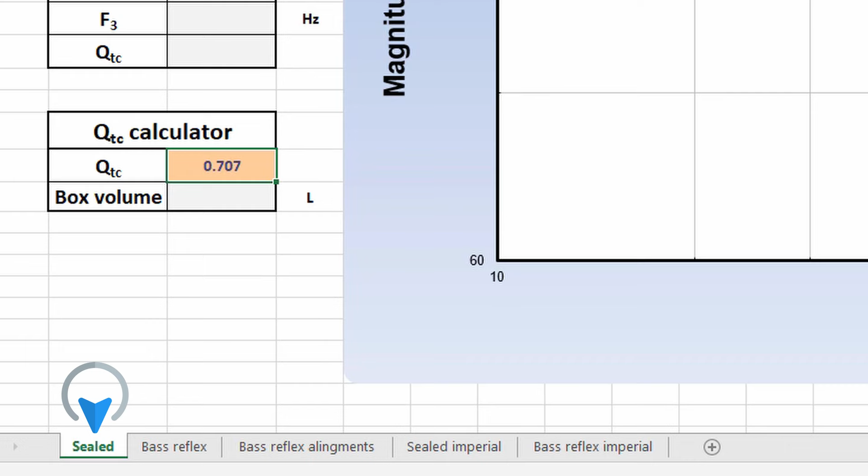So let's open up the spreadsheet and I'll explain things as we move along. First observation: the spreadsheet has multiple worksheets. You can see here sealed, which I covered in a previous video. If you want to design a sealed box, you can check out that video.

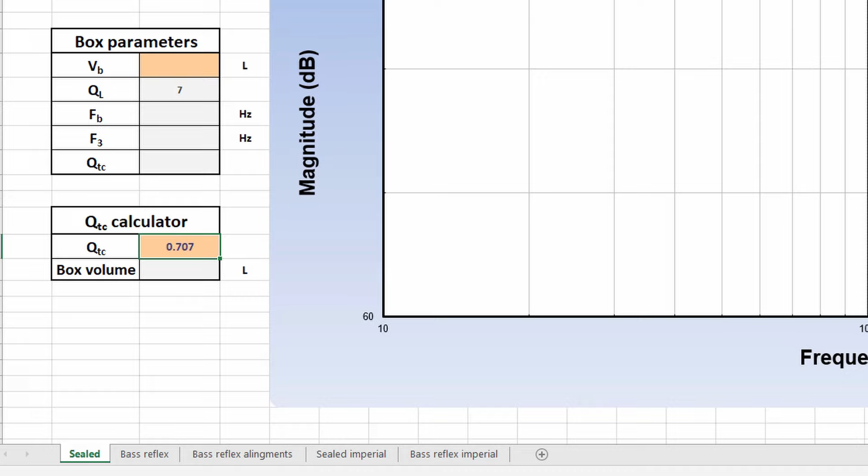Depending on which units of measurement you prefer, you are going to click the appropriate tab. This one is for liters and millimeters, and this one is for cubic feet and inches. The same thing goes for bass reflex boxes. What concerns this video, I'm going to use the metric system, so liters and millimeters.

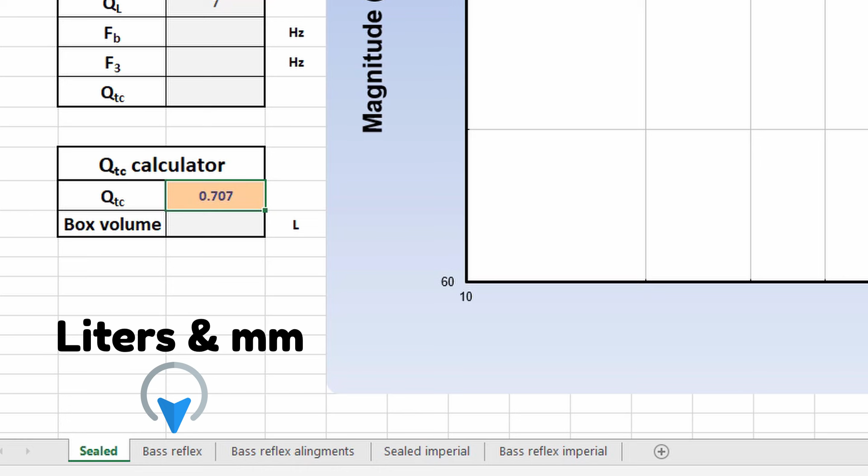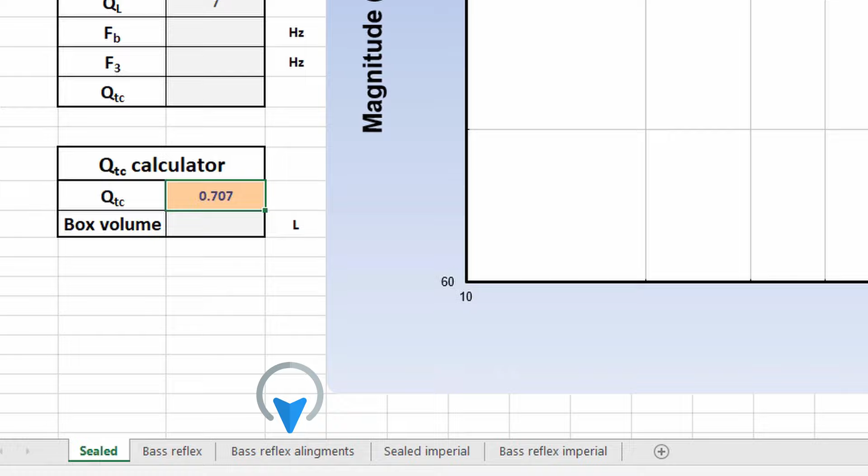Before I click the bass reflex tab, there is another tab which pretty much serves no obvious purpose: the bass reflex alignments tab. If you click it, you will see this table full of numbers. These are copied from the Loudspeaker Design Cookbook and are simply here to be used when calculating the appropriate volumes and tuning frequencies. Now don't get stressed out, I know you got intimidated by this wall of numbers.

But I'm going to say a few words about the alignments because they are not that difficult to comprehend. So here's an explanation. Basically, a speaker has a lot of parameters, one of which is QTS. If QTS is between certain values, then that speaker is eligible for particular alignments. You can think of alignments like presets that will give certain sound signatures which are desirable.

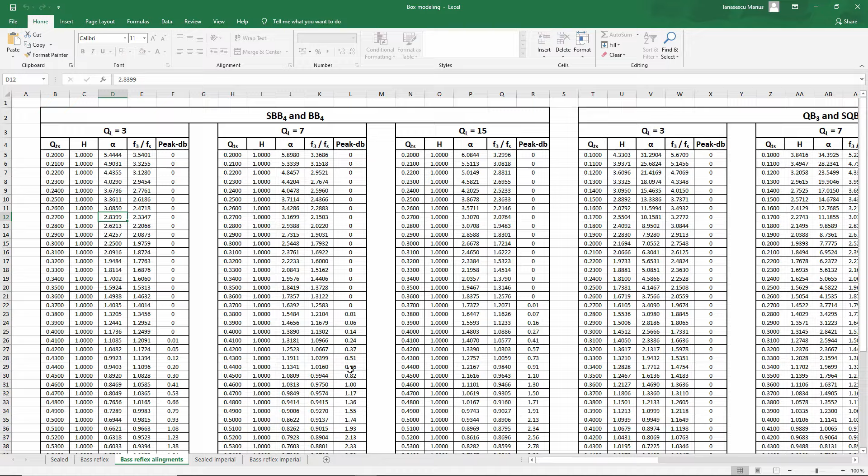Now, if you read the Loudspeaker Design Cookbook and got to this section, you probably got frustrated. No one likes to see a wall of numbers, and also check out the names of these alignments. This is SBB4, or 4th order boombox. This one over here is QB3, or 3rd order quasi Butterworth, and this one is SC4, or 4th order sub Chebyshev.

But don't worry, you don't have to remember anything, you just have to know what response they achieve, and if you are after that response, you can pick that particular alignment. So for example, SBB4 is an alignment which will result in a response very similar to a sealed box. It has a very smooth roll-off and very good transient response.

QB3 is the maximally flat response, usually called Butterworth response, and for all intents and purposes, this alignment is the one which people will aim for. If your particular driver has a high QTS, you might consider the SC4 alignment over the QB3.

Now that we finished talking about the alignments, let's start designing a bass reflex box. So let's click the bass reflex tab. If you are not familiar with my spreadsheets, what you need to know is that in the orange cells, you will input data. If it's not orange, you leave that cell alone as it might calculate something and you can mess up the formula.

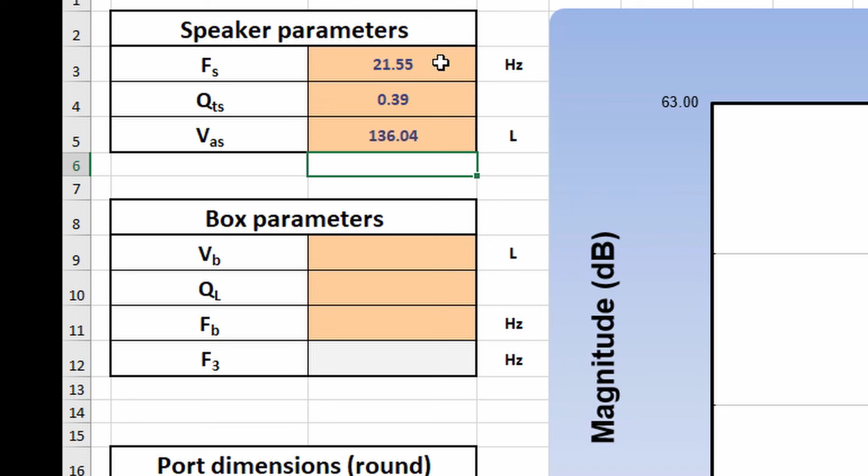What concerns the parameter in the middle, QL, refers to box losses. This is an optional parameter, and some modeling apps don't even mention it. It indicates the leakage of your box. If you have a leaky box, QL is low, like 3. Normal losses, QL is around 7. Low losses, QL is about 15.

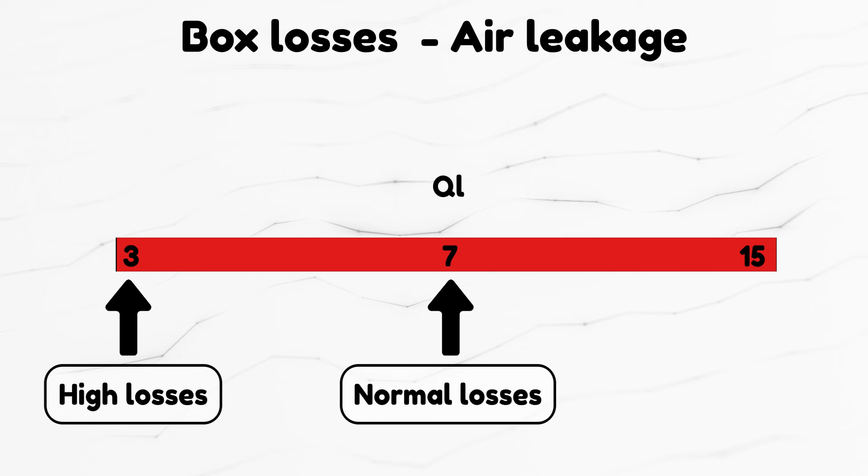To be honest, box losses cannot be predicted and can only be measured after the box is made. So I don't know why I complicated this spreadsheet with this extra parameter. Just enter 7 here, which means normal losses.

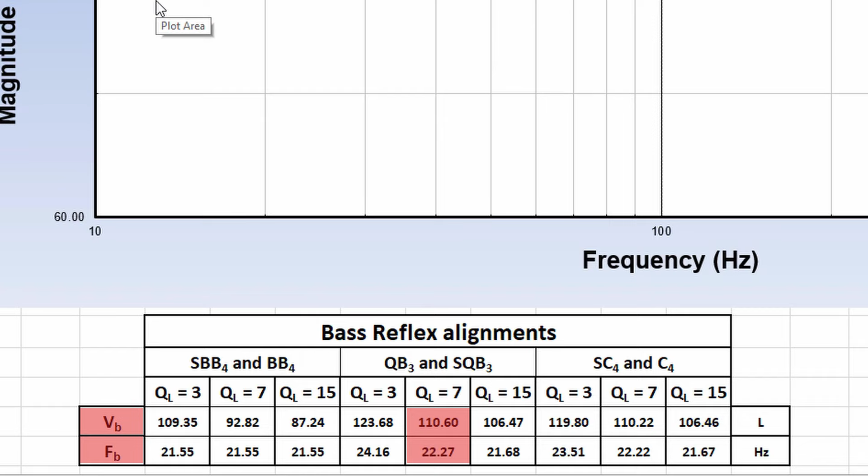Now let's come back to the idea of alignments. You can see in this section that we have the box volumes and tuning frequencies for all 3 alignments. Please look only under QL of 7. So here for SBB4, here for QB3, and here for SC4. We can see that all 3 alignments are available for this speaker.

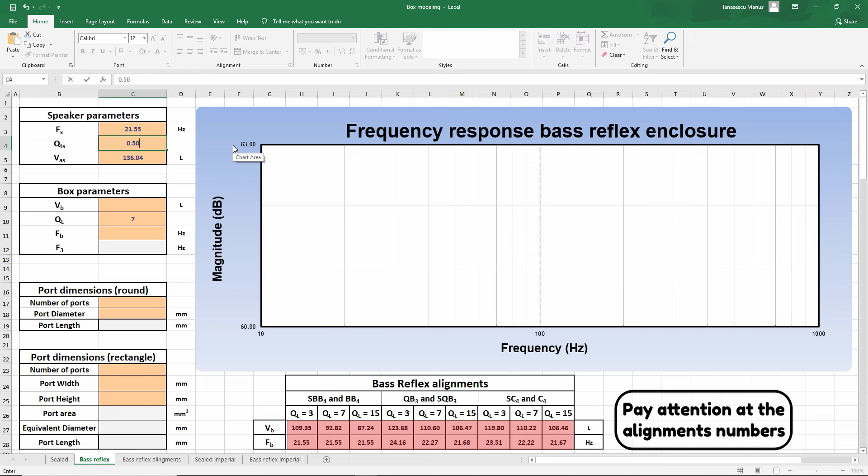If I start increasing the QTS of the speaker, so let's say 0.50, 0.6, 0.7, 0.8, at some point some alignments won't be available. So depending on your speaker, you can or cannot use certain alignments. However, 90% of the time you can use all 3.

So let's switch to the correct QTS, which is 0.39. Basically what I recommend is to copy the QB3 numbers, so a box volume of 110.6 liters, and the tuning frequency 22.27 Hertz. As you can see, the response is very flat, which is a good thing, and this is the response people should aim for.

Now let me give you an example when you would want to choose SC4 alignment over QB3. Let's make a scenario where your driver has a high-ish QTS value, like 0.55. Let's enter the QB3 values. Not only this box is stupidly large, 2500 liters, the response has this huge peak right before roll-off, which defeats the maximally flat response thing. Problem with this alignment is that it tries to keep this line as flat as possible until it can't, which is right before roll-off.

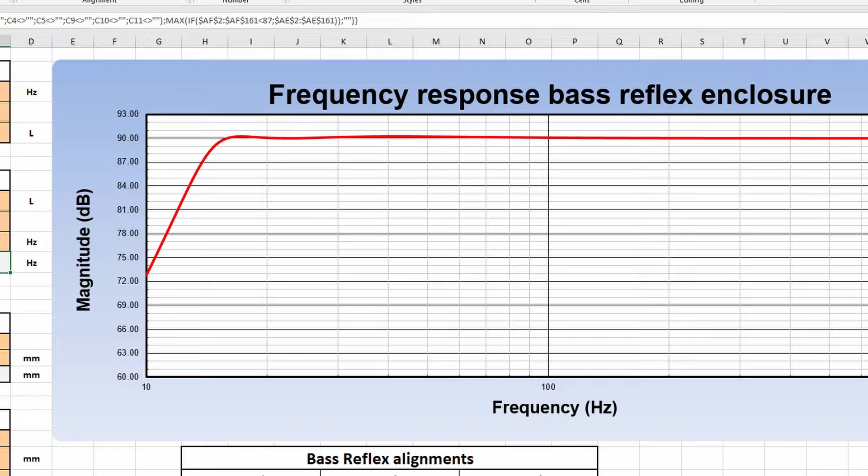However, if you enter the SC4 numbers, we can see that the response is much flatter. Only difference is that there is a slight deviation here, and here is a slight dip. What I mean is that for higher QTS drivers, you should probably pick a sealed box. But if you insist on a bass reflex, it would be wise to choose the SC4 alignment.

Now let's switch back to our driver, so QTS of 0.39, and let's go back to the maximally flat response. One thing to note is that these alignments are not set in stone, and you can choose whatever box volume and tuning frequency, but they are a nice starting point.

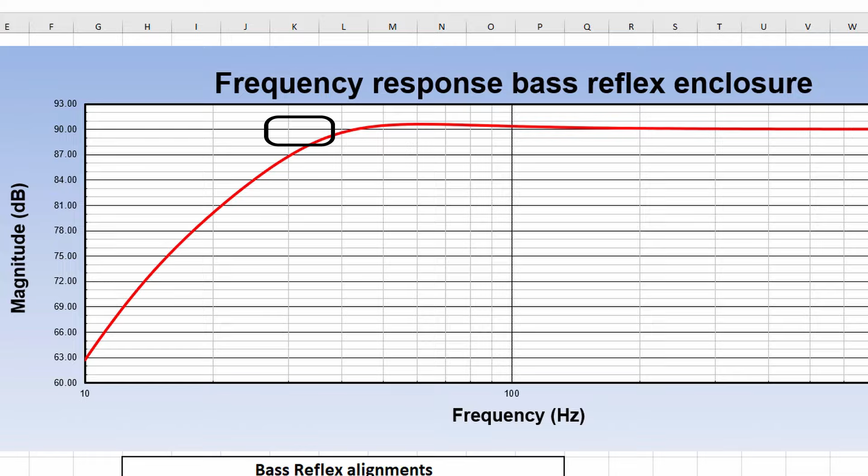So for example, a 110 liter box might be too much for you. In that case, we can make it a more decent size, let's say 60 liters. As you can see, we lost some of the very low frequencies, so there is a trade-off for making the box smaller, and you are the one to decide if you want to make that trade.

Furthermore, if we already lost some of the low frequencies, we might choose to tune the box higher and see what that does. Let's say 30 Hz. As you can see, we start to get this peak right before roll-off. Ideally, you don't want this peak to exceed 3 decibels. Here it's only 2 decibels above linear response.

Also, if we look at F3, which indicates the lowest frequency the box will play in a linear fashion, we can see that the box will play down to 30 Hz, which is pretty good. In that case, let's decide on these numbers: box volume of 60 liters and tuning frequency of 30 Hz.

Now let's move forward to the port. This is the only noticeable caveat of this Excel spreadsheet. It doesn't calculate the air velocity inside the port, and there is no way to tell if your port is undersized. However, having a large port is always beneficial, so even though we don't know the precise air velocity, we are going to go for the maximum diameter possible.

There is a limit. As you increase the diameter of the port, you need to make it longer to maintain the same resonant frequency of the box.

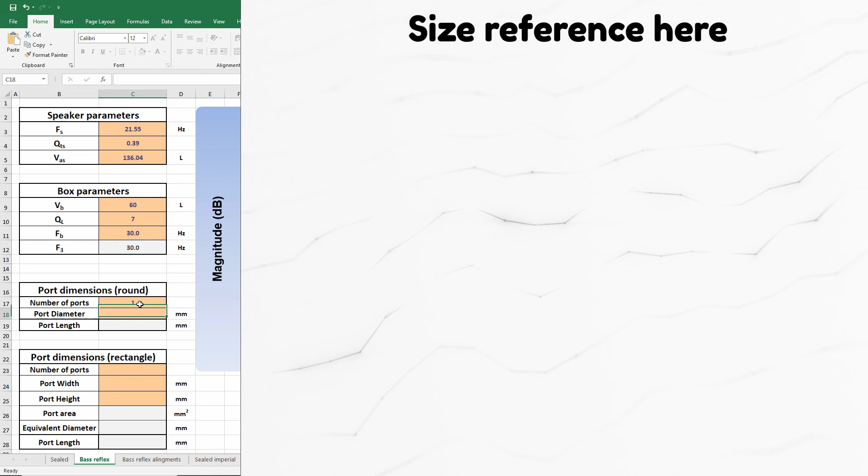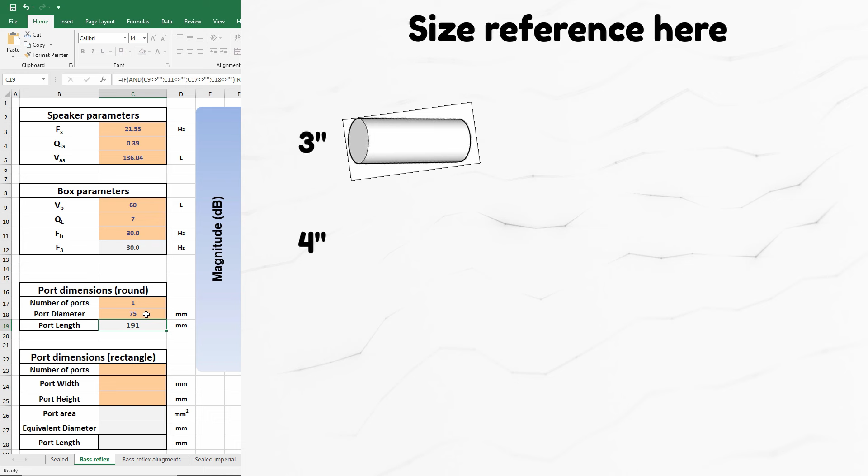Let me show you. If I use a 3-inch port, which is 75 millimeters in diameter, so one port of 75 millimeters, the length needs to be 191 millimeters. If I want to use a 4-inch port, which is 100 millimeters, the length needs to be 364. So as you can see, the larger the diameter, the longer the port needs to be.

And since we have to fit this port inside the box, you can imagine there is a point where the port is so large that it doesn't fit inside. The next size is 6 inches, so 150 millimeters, and that needs to be 873 millimeters long. Good luck fitting that inside a 60-liter box.

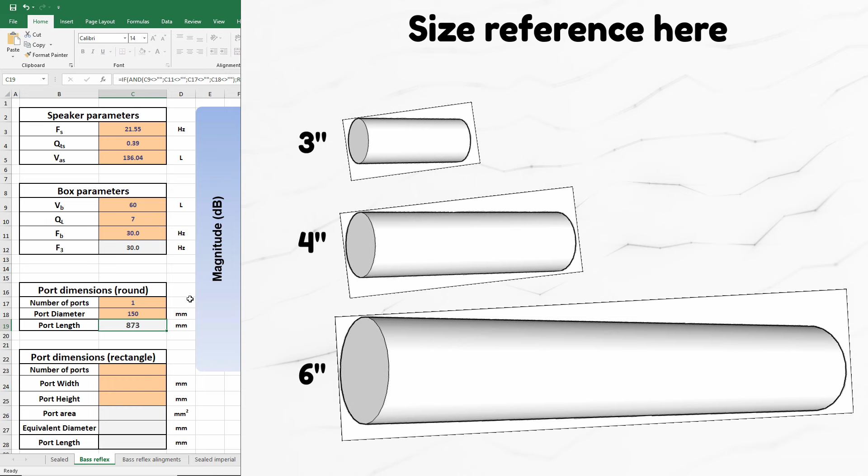So basically, we found our limit. We need to use a 4-inch port. If you want to be on the safe side, you can use 2 ports: 100 millimeters, but those need to be 800 millimeters long each. One is 800 millimeters and the other is the same length, 800 millimeters, which would also be a challenge to fit inside, probably impossible. So that settles it. The port is 100 millimeters in diameter and 364 millimeters in length.

However, using a rectangular port can solve this issue. If you have a powerful subwoofer with high excursion, you might get the feeling that a 4-inch circular port might not be enough and you might encounter port noise at high volumes. In that case, you should use a rectangular port. This isn't the case here because this is a 120 watt woofer, so a 4-inch port will be no problem.

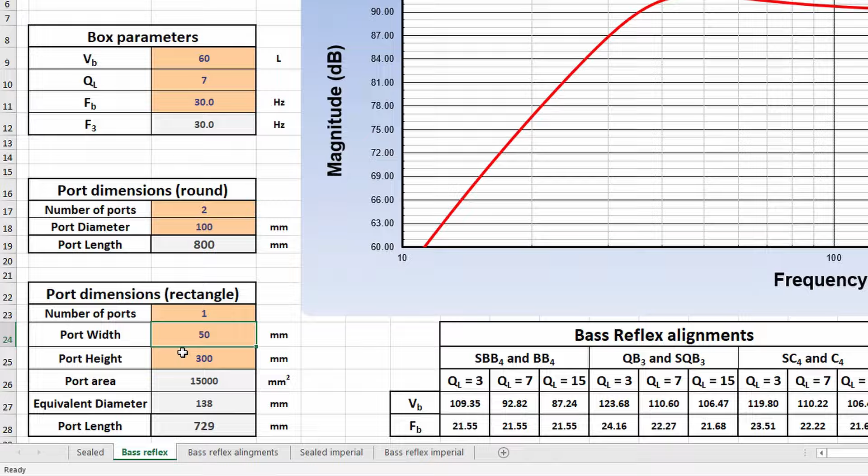But let's see how to design the bass reflex box using a slot port. Since this is a 12-inch woofer, let's say the height of the port is 300 millimeters, and let's select 50 millimeters in width. Conveniently, I placed an equivalent diameter calculator. This tells us that this rectangular port is equivalent to a 138 millimeter diameter circular vent, so this is much better than a 4-inch port.

Finding the space for this port inside the box is much easier by using an L-shaped design. So to draw a conclusion, we have a 60-liter box tuned at 30 Hz, and the port is a rectangular port, 50 millimeters wide and 300 millimeters tall.

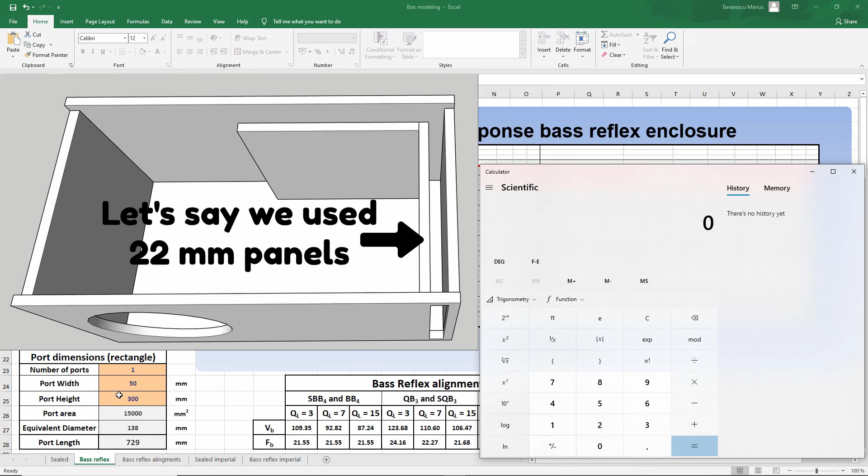Now, because the port is fitted inside the box, it will take up space, and we need to account for that. We need to calculate the volume displaced by the port, and if this is a slot port taking advantage of a side panel, you can calculate the volume this way. Let me bring up the calculator. You take the thickness of the panel plus the width of the port, so let's say 22 plus 50, which equals 72.

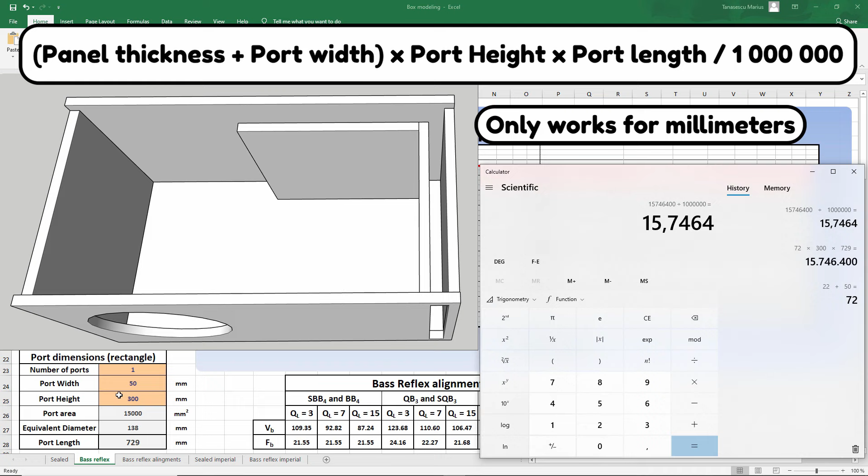And if we multiply this by the height, 300 millimeters, and multiply it again by the length, which is 729, the result we divide by 1,000,000, and there we have the volume displaced by the port, which is 15.74 liters. However, like I said before, this is a low power subwoofer, so there's no need to use this rectangular port since it takes so much space and would make the box larger than it needs to be.

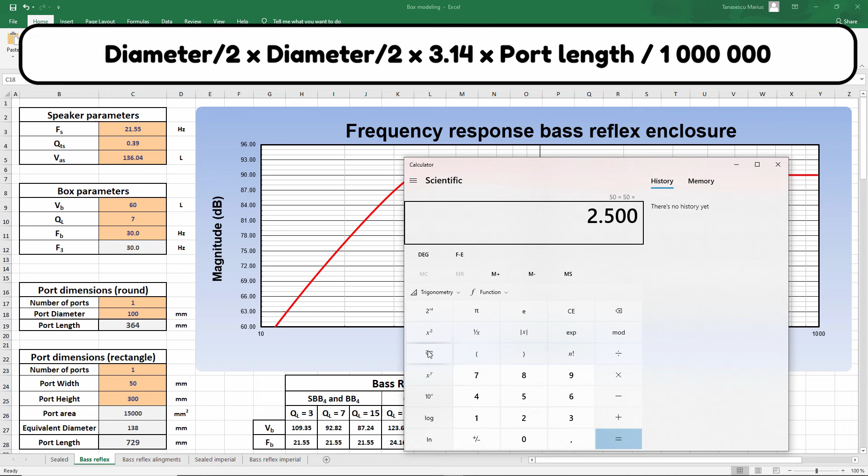So let's calculate the volume displaced by the circular port. Let's work with our numbers: 100 millimeters diameter with 364 millimeters in length. Let's open the calculator again. We take half of the diameter, which is 50, and multiply it by itself, then multiply by pi, which is 3.14. This number we multiply by the length of the port, which is 364, and again divide by 1,000,000. We have 2.85 liters.

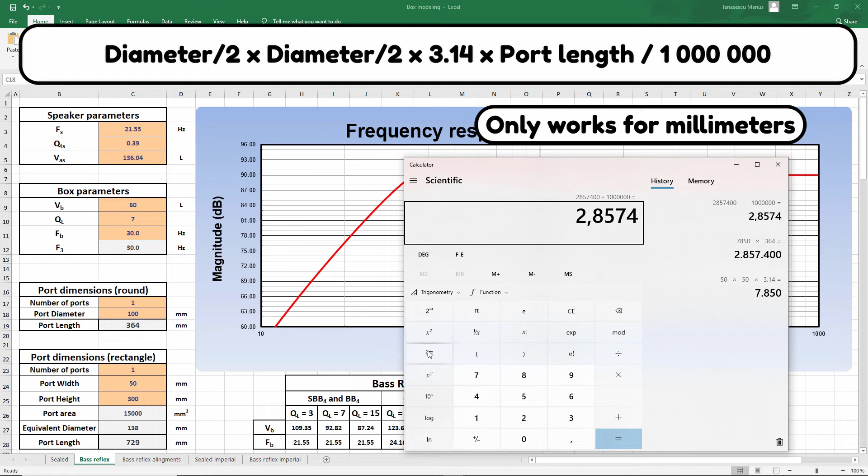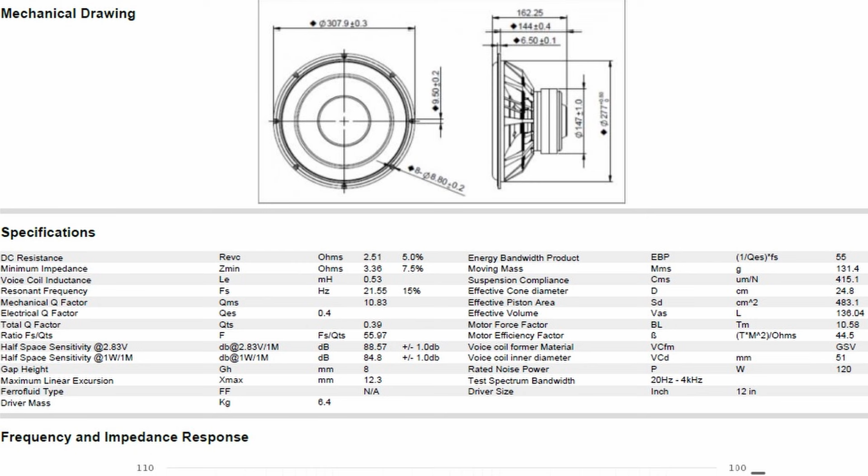Also, if you plan to place the speaker driver with the magnet inside the box, you have to add the volume displaced by the speaker. You usually find this in the spec sheet of the driver; however, our spec sheet doesn't have this number, so we have to approximate it, around 2 liters. So our final box needs to have 60 plus 2.85 plus 2, which equals 64.85 liters. If you are placing any bracing inside the box, you have to add the volume displaced by the bracing also.

So the results are a box with a volume of 64.85 liters, with a circular port of 100 millimeters diameter, and the length of 364 millimeters.

A question that might pop up is, where do I place the port? You're going to place it on whatever panel is convenient. For example, if you're making a subwoofer for your car and the box will rest against the rear bench, don't place the port on the back panel because it will be choked. Rather, place it on the front panel or the side panel. The top panel is rarely a good pick, as dust can easily get inside your box through the vent.

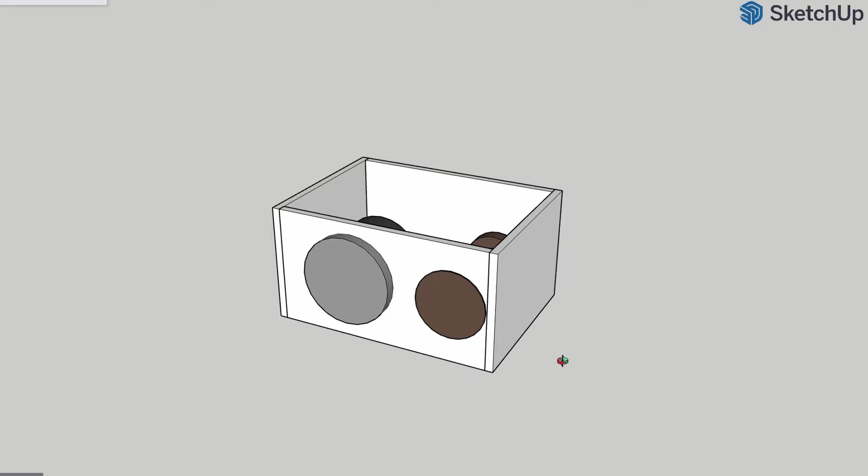Another thing to consider is that inside the box, the port needs to have sufficient clearance. As a result, the end of the port must not be too close to an opposing panel. How far, you ask? Well, it depends on the size of the port. If in this case we have a 100 millimeters diameter port, make sure to have at least 100 millimeters of clearance.

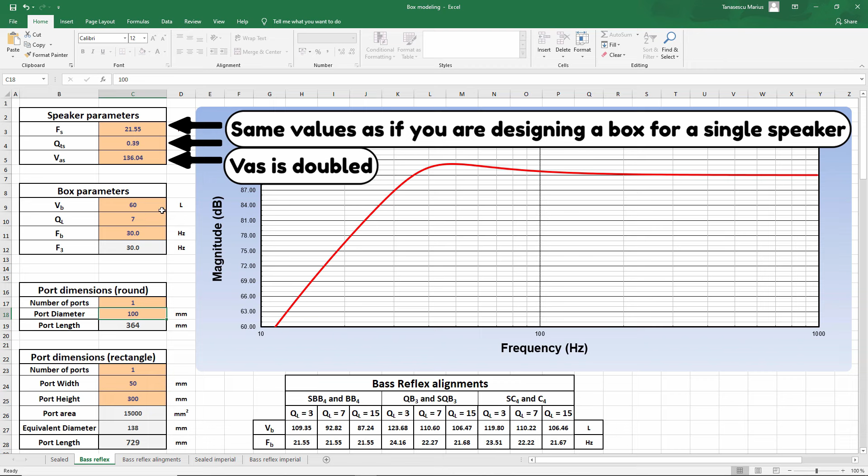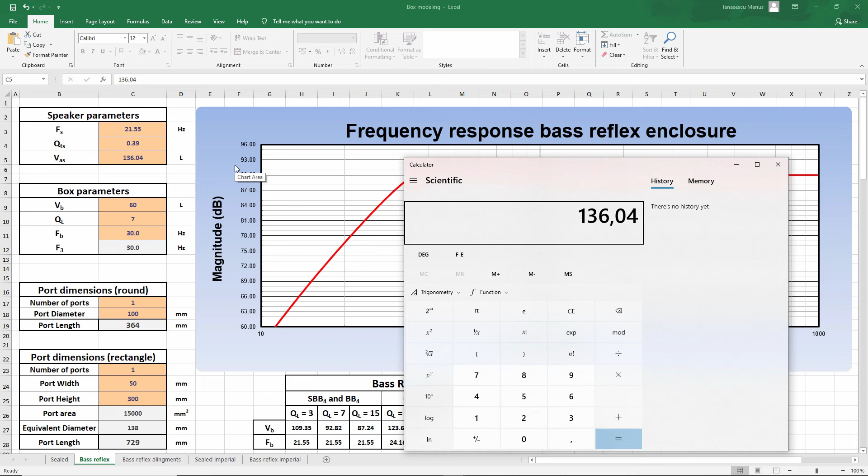One other question that might pop up is, what if I have 2 speakers, not just one? Well, in that case, when you enter the parameters, FS and QTS will be the same, and you just double the VAS value. In this case, we have 136.04 multiplied by 2. This is the new VAS number, 272.08. Or simply you multiply by how many speakers you have. If you have 2 speakers, we double the VAS value. And now you are designing a box for two identical speakers which will share the internal volume.

Now let's verify the accuracy of the Excel spreadsheet and compare the results with WinISD. So before we start WinISD, let's switch back to one driver. So the VAS is 136.04. And now we can open WinISD.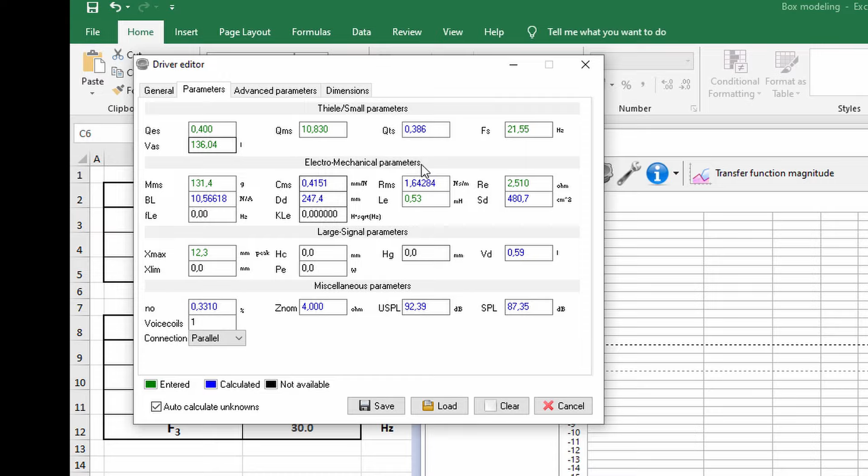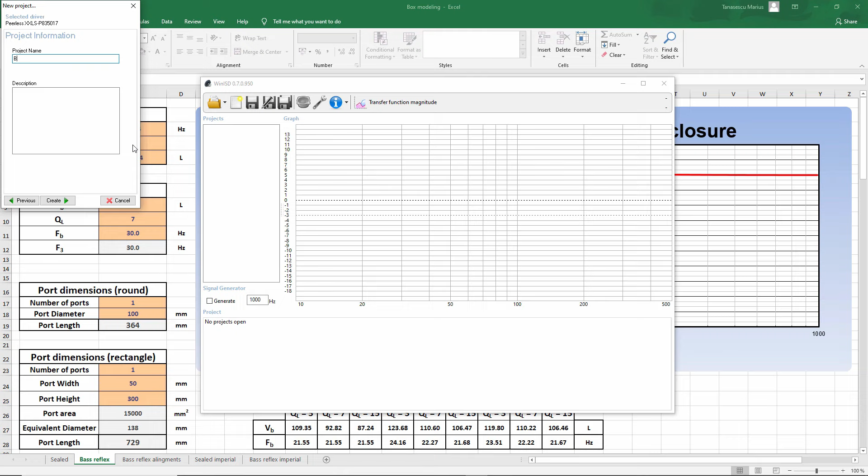And if we look into the database, we can search for our Peerless driver. I want to show you that here we have all the parameters of the speaker, not just those three. And if we start a new project, let's select the driver, Peerless. Okay, so one driver, vented box, and let's rename it bass reflex. Okay, so now let's enter the parameters of our box.

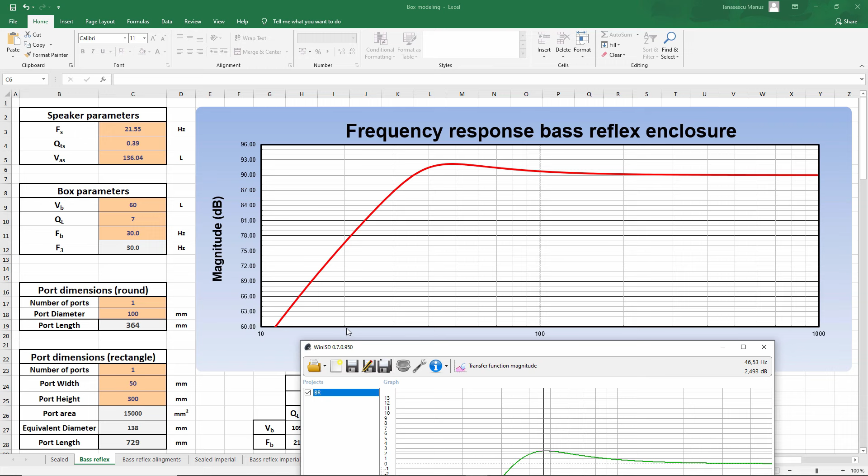So we have a 60-liter box, which is tuned to 30 Hertz. And if we look at the graph, we have a peak at around 40-something Hertz of 2.5 decibels. And if we look on our graph, 10 Hertz, 20, 30, 40-something Hertz, we have the same peak over here. If we look at the F3, which is 30 Hertz, this is this point over here, minus 3 decibels. If we go down here at minus 3 decibels, we can see it's precisely at 30 Hertz.

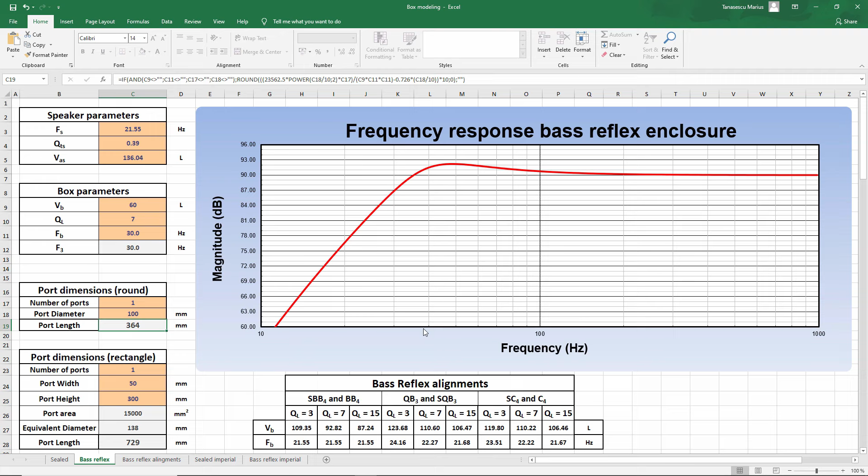If we go to the vent and enter 10 centimeter diameter, the length needs to be 362. And our Excel spreadsheet says 364, which is basically the same. If we choose a rectangular shape vent, 5 centimeters wide and 30 centimeters tall, it has to be 729, which is precisely the same. As you can see, we get the same results.

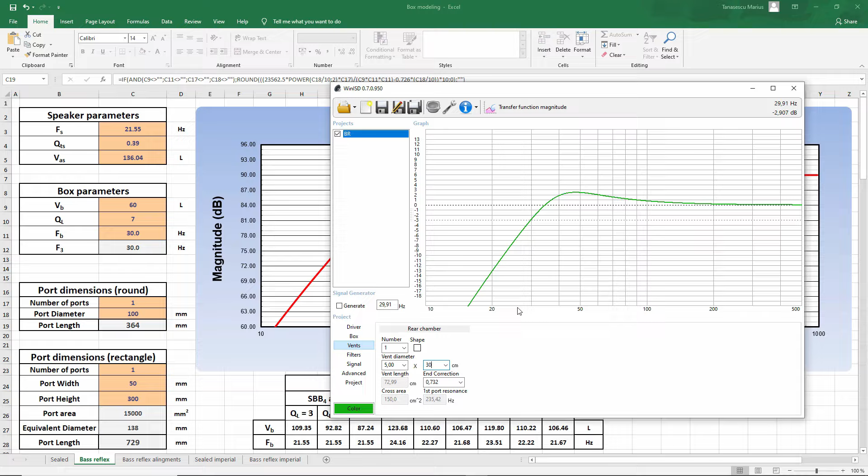So don't be fooled by the fact that we input just 3 parameters, while in WinISD we enter all of the parameters. As this video comes to an end, we can reiterate the steps.

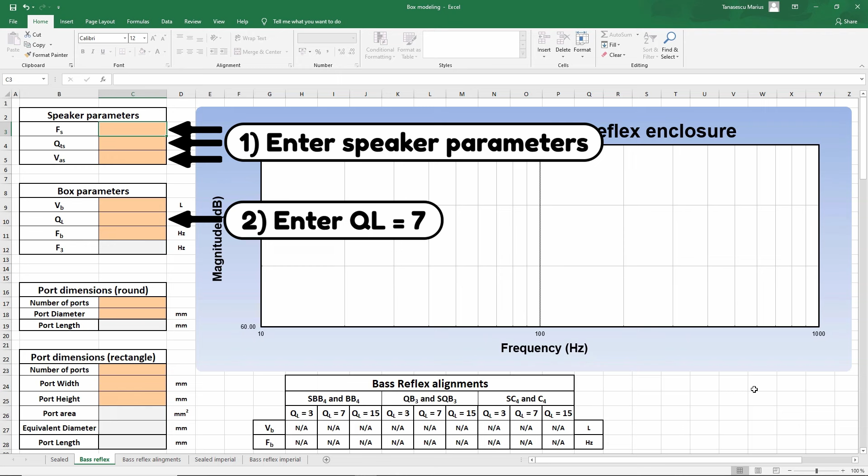So first you have to enter the parameters of the speaker. Then you will enter QL of 7. Then you can copy the box volume and tuning frequency of whatever alignment you like, preferably QB3. If you are satisfied with the numbers, you can leave them as is. If not, you can fiddle with the box volume and the tuning frequency.

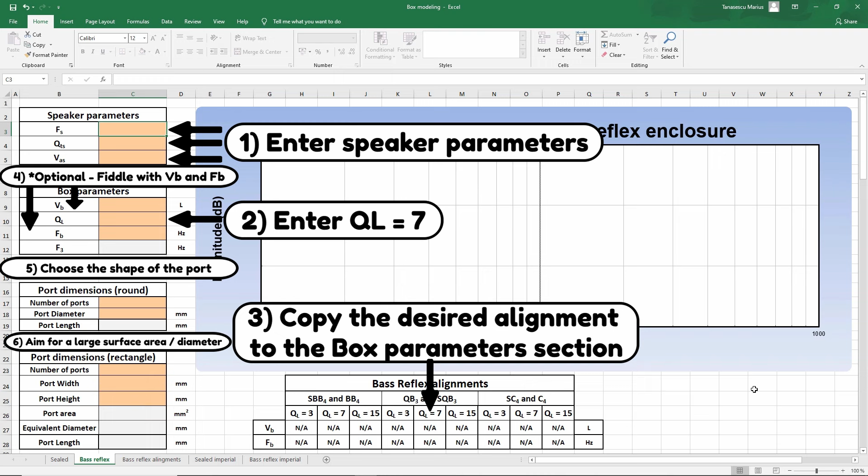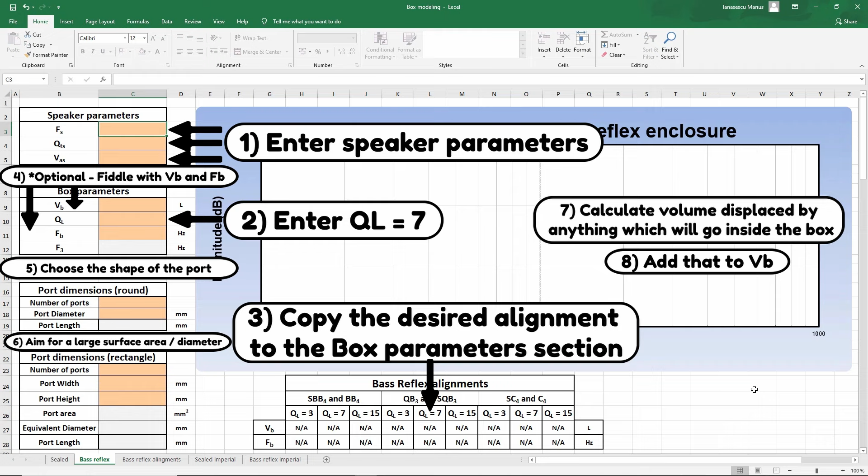Then you have to choose whatever port you like, circular or rectangular, and go as much as you can in diameter. The higher the diameter, the better, until that port will not fit inside the box anymore. Then you will calculate the volume displaced by the port, the speaker, and whatever else you place inside the box, and add that to the previously calculated volume to get the gross volume. And when you have the gross volume and the size and shape of the port, you can easily calculate the panel dimensions of the box and build it yourself.

Now I know that this might be a longer video, but hopefully now you know how to design your own bass reflex box.